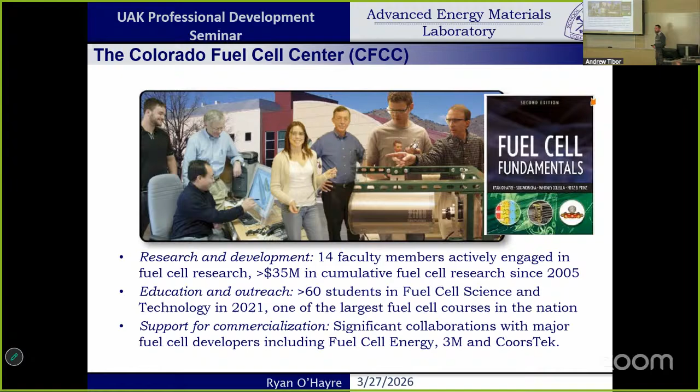So if you ever have a chance to come down to Colorado and you're in the Golden area, please come visit us. We do have skiing in mountains; this year, not so much. The snow hasn't been very good, but yeah, there's some good stuff to be had. That's Dead Dog Couloir, Torrey's Peak, less than a 40-minute drive from Golden. Matt and I did that. Actually, it was in March, I think, around spring break time. I don't know, 20-some years ago. And this is from that. I think that's also from Dead Dog. Some pictures from the Aspen tour. Yeah, good times. Fun stuff to be had down there.

All right, so let's talk about fuel cells. So what is a fuel cell? A fuel cell is a way of taking chemical energy, usually gases, and converting those directly into electricity through the magic of electrochemistry. So instead of burning the fuel like we would in a combustion engine and then eventually turning that into electricity, you can do it directly. And this schematic is kind of what the very first fuel cell developed by William Grove more than 150 years ago might have looked like when he was doing the experiments in his lab.

So imagine you have a glass beaker and it's just filled with sulfuric acid. And then you take two wires. They should be catalytically active. So if you've got the money, maybe you want to make them out of platinum. And you dip those two wires into the sulfuric acid. And then you take two little tubes and you bubble either air or pure oxygen across one of the wires. And then some type of fuel, hydrogen works best, but it's not the only fuel you can use, and you bubble that across the other wire.

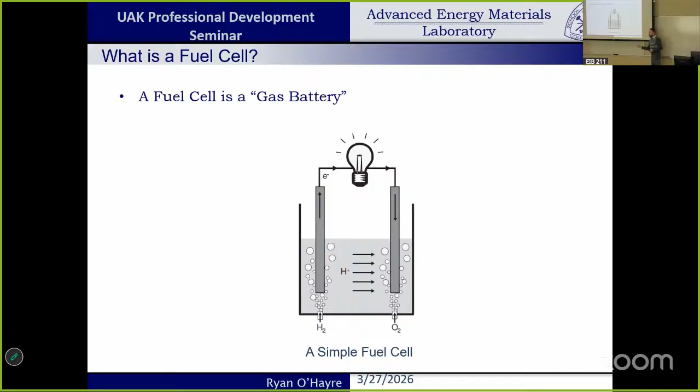Cross contamination, yes, absolutely, right? So you're going to get crosstalk. What if some of the oxygen sees the hydrogen and they both meet on one of the wires? That platinum catalyst is going to catalyze a combustion reaction and you just have yourself an explosion. So you want to bring those really close together, but you can't let the gases talk to each other. So we can think about maybe going from a liquid electrolyte to a solid electrolyte. Okay, so those are exactly the type of design principles that are used in modern fuel cells today.

So this is what a modern fuel cell looks like. Instead of those wire electrodes, we use big plate electrodes. And instead of aqueous sulfuric acid as our electrolyte, we use this thin polymer or ceramic membrane, which serves the same purpose. So it's electrically insulating, but it's ionically conductive. And because it's solid, that allows us to make it super thin and bring these two electrodes as close together as possible. But the gases still can't permeate through that solid membrane. So most of the problem's solved.

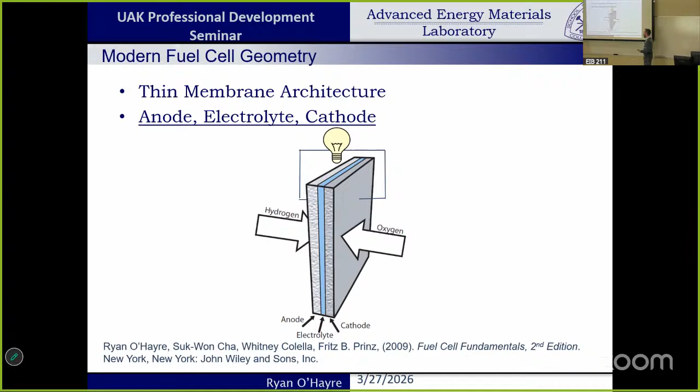All right. So why are we excited about fuel cells? They offer some interesting advantages. We don't go through combustion, so we don't go through the heat bottleneck, the Carnot cycle efficiency. That means we can be more efficient in producing electricity. We're not burning anything, so there's no particulates, there's no NOx or SOx or pollutants that are generated.

These devices are silent, so there's no moving parts. There may be some moving parts associated with the system, we'll talk about that later, but the fuel cell itself doesn't have any moving parts. So the military is interested in them because they're quiet power conversion devices.

The fuel cells are remarkably scalable. So we've made fuel cells that fit on an integrated circuit chip that you can use for remote sensing applications. And then there's also fuel cells that are big enough to make an entire power plant, the megawatt scale. You can't really scale combustion engines to fit on a microchip, right? So there's not many other power technologies that scale from the microwatt to the megawatt.

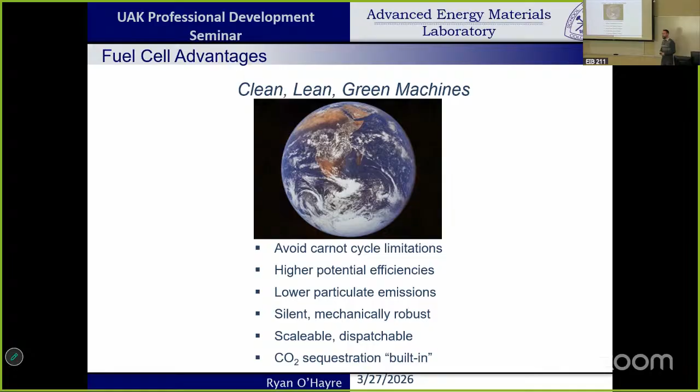Now there's also one interesting advantage, and I think it would be particularly interesting if Alaska wanted to pursue larger scale fuel cell applications. And that is essentially fuel cells give you CO2 sequestration for free. Okay. So I want to talk a little bit about this because this is hardly ever mentioned in the fuel cell field, but I think it's a really interesting advantage.

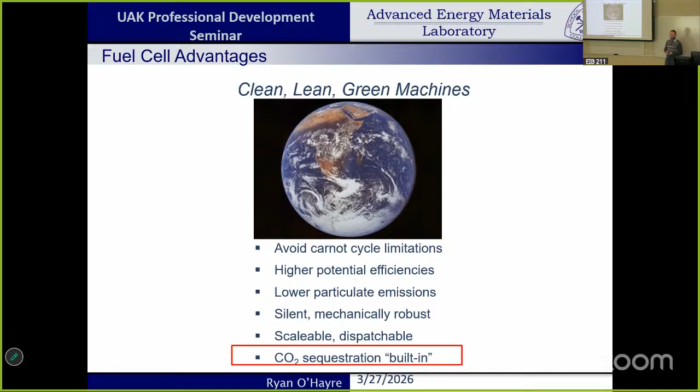So let's think about how we mostly make electric power today, which is in a conventional fossil fuel power plant. This could be coal, could be natural gas, but basically whatever you have, whether it's natural gas or coal, you feed it into some type of a combustion chamber, you mix it with the air, you do combustion, and as a result, you're going to have a single outlet and a single exhaust of your combustion products. And so that exhaust contains the CO2, which we might want to separate, and everything else.

And part of the problem with doing CO2 sequestration is how do you do that separation? And so if we wanted to sequester the CO2 from a conventional power plant, for every 2 conventional power plants that we want to sequester CO2 from, we'd have to build a third one just to provide enough energy to do that separations process. All right, so that kind of makes it non-economic.

Now let's think about how a fuel cell would do this. So same idea, we're going to use methane or coal, whatever we want to use as our fuel, just like a conventional power plant, and air. But now this is a membrane device, right? So you have the solid membrane separating two electrodes. And so you have two gas compartments. And those two gases never mix. They always stay on either side of the fuel cell. So the fuel always hangs out here, the oxygen always hangs out here, and you get two separate outlets.

The kind of reacted fuel, which is mostly just CO2 with some water, and then the cathode exhaust, which has everything else. The water is really easy to separate. All you do is cool the stream down, which you have to do anyway to recover heat. So you cool this down below 100 degrees, the water crashes out as a liquid, and you basically have pure CO2. You can sequester, you can use it for useful purposes, make a beer, whatever you want to do. So that's a huge advantage of fuel cells over conventional power plants.

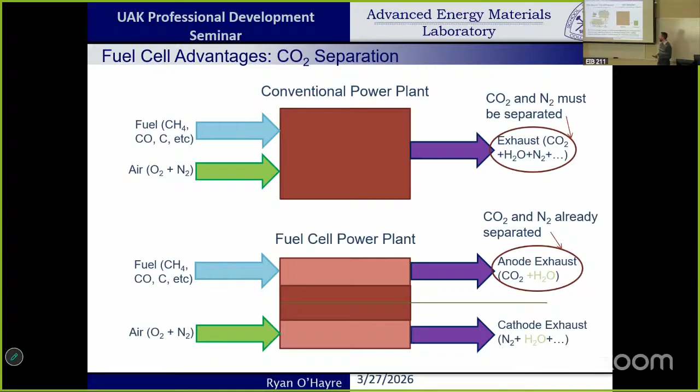Another interesting advantage of fuel cells that's just kind of in the last 5 years or so taken off is what's known as reversible fuel cells. So if you take a fuel cell, here's our fuel cell, we're supplying hydrogen to one side from a tank, air to the other side, we make water. All right, so that's a fuel cell, we're making electricity.

What if we have renewable power on the grid and it's a sunny summer in Alaska, we've got tons of renewable power that we don't know what to do with. All right, so once we've already powered all our homes and our buildings and everything else, we still have excess renewables. We can use that to reverse our fuel cells, the same exact device. Now we're just going to send electricity into it and run it backwards. When we run it backwards, we feed it water and it'll split the water. It's what's called electrolysis, and make hydrogen.

So we use that extra renewable energy in the summer that's basically free to make hydrogen, and then we can store it. Here, where you've pumped the oil and gas out of the ground, you've got a lot of caverns that are suitable for geologic storage. So you could pump all that hydrogen down underground for almost free. And then in the winter when it's cold and dark and you need that electricity, you simply run your device again in fuel cell mode and you pull that hydrogen that you've stored all summer out of the ground and you make electricity. And so you can do this back and forth, just like a battery.

But essentially this is a giant gas battery with a storage that's much, much larger and more extended than it would be for a battery system, right? Because we can take advantage of geologic storage to store all that hydrogen. In addition, if you look at the relative size of a fuel cell versus a battery, for the same amount of backup power, you can do it in a fuel cell that's much smaller than the equivalent battery. So space is also a constraint. Then again, fuel cells can win.

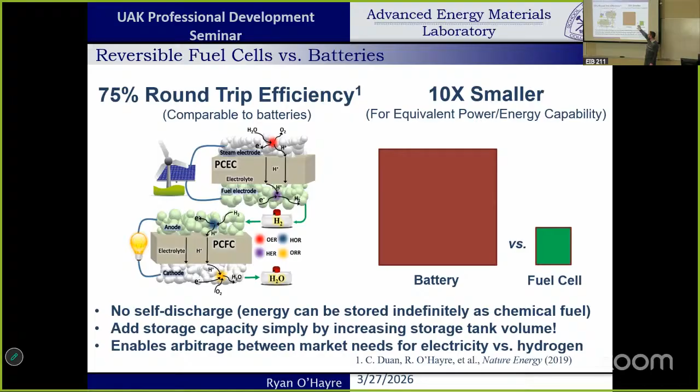So the polymer fuel cells work with that electrolyte. Remember we said it's important to make that electrolyte as thin as possible. We've got to make it out of a solid so the gases can't cross. So for the polymer electrolyte fuel cells, that electrolyte is a polymer. So if you ever have leftovers and you put saran wrap over the leftovers before you put them in the fridge, that polymer membrane that's inside of those fuel cells is basically like saran wrap. It's a super fancy saran wrap that conducts protons, but effectively, if I were to give you a piece of this, you wouldn't really be able to tell the difference between that and saran wrap. So that's kind of what it feels and looks like.

So those run at basically room temperature, or a little bit above room temperature. They're pretty high power density, so a small little fuel cell device can make a lot of power, but they're not super efficient. They're typically 40 to 60% efficient. That's better than an engine, but it's nothing to write home about.

The solid oxide fuel cells, these are the ones based on ceramic technology. So think toilet bowls, coffee cups, but these are super, super thin, again, plates of ceramic. And it's a special kind of ceramic that's an ion conductor. So to get the ceramic to conduct ions, you have to heat it up to kind of glowing red hot temperatures. And then it works. So it doesn't work at room temperature.

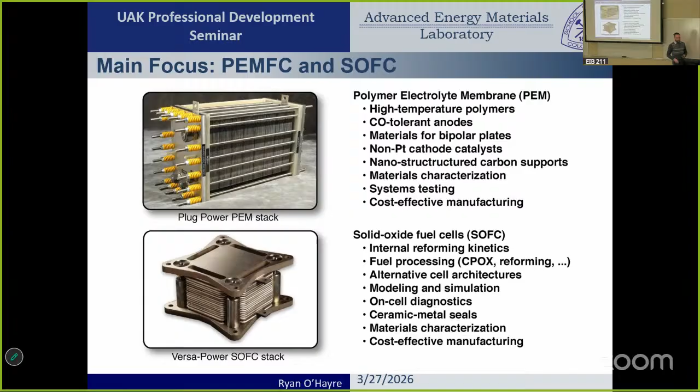And so hydrogen goes in on one side, oxygen goes in on the other side, water comes out. If there's any hydrogen that doesn't get reacted, it'll come out here. You can recycle it back in, so you never waste or lose any of the hydrogen. And the electrons, again, are collected. Usually these manifolds are electrically conductive. So not only do they provide the sealing and the distribution of gases, they also provide the electrical contact. And so just like the battery, you have your two little terminals that you hook up, right? These would be where you would attach your wires to collect the electricity that's generated.

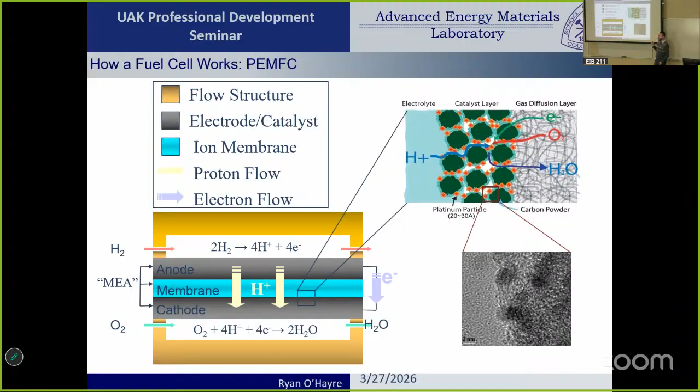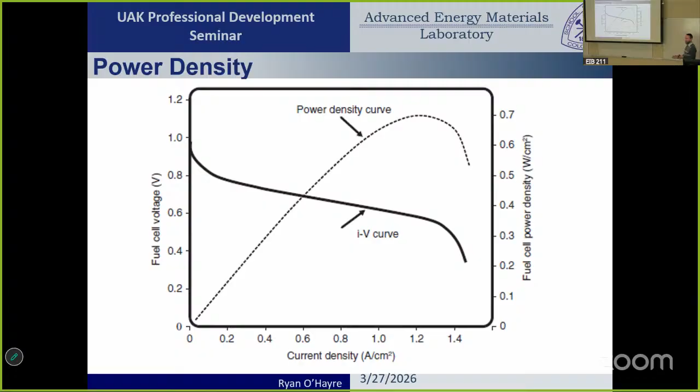Okay. So this power curve will tell you, per unit area of fuel cell, how much power you could produce. And you might want to operate here at the power density maximum if you care most about power. But if you care most about efficiency, you'll typically operate in this region, somewhere on the upward slope of the power density curve, but not all the way at the top. And that's because you'll operate more efficiently here. So there's always trade-offs. What do you care most about? Efficiency, power. So you can figure that out for your specific application, how you design your fuel cell.

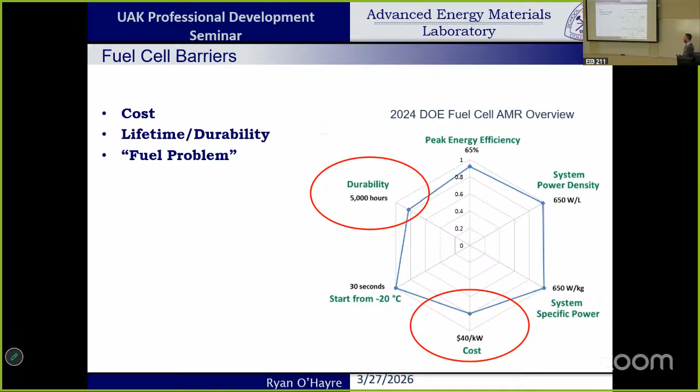So I circled the two that we're kind of the furthest away from: durability, how long they last, and cost. Right now they're really expensive and they don't last very long. So nobody's going to buy a technology that's expensive and then doesn't last as long as the incumbent technology that's already cheaper. So those are things we really still have to work with.

Okay, so that brings us to fuel cell technology. So first, how do you make these things? If you were to come down to Colorado and visit the fuel cell center, you can actually see how fuel cells are made in the lab. The process is very different for the polymer fuel cells, the low temperature fuel cells, versus the ceramic high temperature fuel cells. If you've ever made a t-shirt using a screen printing process, or if you've ever seen a roll-to-roll newspaper press, you basically use those same technologies to make a polymer fuel cell. It's like making newspaper or making t-shirts.

The only difference compared to a newspaper or a t-shirt is the ink. This will be the most expensive ink you've ever used. And that's because the ink has all this platinum in it, right? So you wouldn't use this ink on your t-shirt. All right, so PEM fuel cells, polymer fuel cells, the fabrication process, super cheap, super easy. The materials that go into it, like this ink and this polymer membrane, those are very, very expensive.

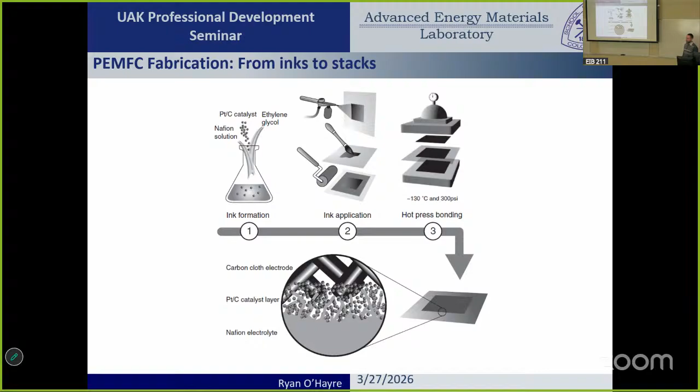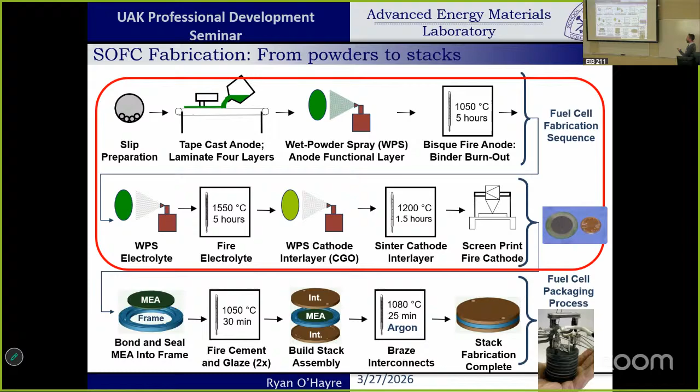Okay. Ceramic fuel cells are kind of the opposite. The materials, the raw powders that you use, are super cheap. They're basically like rocks. Ceramics tend to be pretty cheap. What's expensive is the fabrication process. It's tons and tons of steps. Many of these steps require super high temperatures, and that's expensive, like firing at 1550 degrees Celsius, that gets pricey. So it's the fabrication process that's the Achilles heel for the high temperature fuel cells.

So again, here's a few more examples of the polymer and solid oxide. The nice thing about the solid oxide fuel cells, right, we can form ceramics into pretty much any shape you want. You can make a coffee cup or a toilet bowl out of ceramic. And so, if you wanted to, I suppose you could make a toilet bowl shaped ceramic fuel cell. It probably wouldn't be very good, but you could do it.

So the two most common architectures for solid oxide fuel cells are these planar button cells or tubular cells. Tubular cells have some mechanical advantages. They tend to be stronger, everything else being equal, compared to a flat plate. Here you see these are all square, but for the ceramic ones, we tend to make them circular. Again, thinking about strength, does anyone have an idea why we might do circles instead of squares? So the corners don't break off. Bingo, right? Stress concentration factor. In a ceramic, the corners would be the failure points. So if you make it a circle, you don't have any corners, you minimize stress concentration.

And how do you hook terminals to them? Great, here we go. So just like with batteries, a single battery, like an alkaline AA or AAA battery, is about 1.5 volts. Your flashlight needs 9 volts or something, right? So what do you do? You take a bunch of batteries and you stack them back to back in your flashlight. Same idea with fuel cells. We usually don't just operate a single fuel cell, we operate a stack of fuel cells.

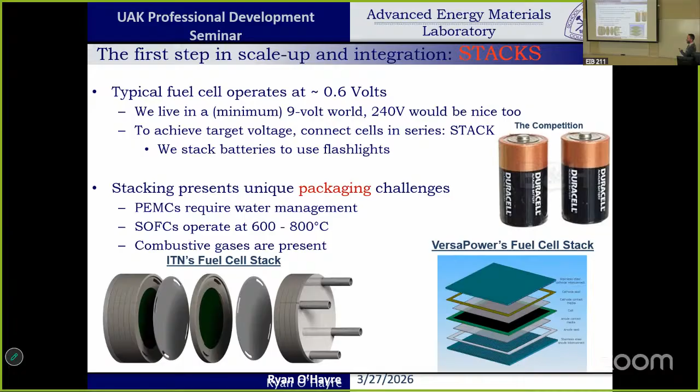So somehow we need to figure out how to package fuel cells so they're just as kind of dummy-proof, the Army says, as batteries. Once we can make fuel cells like this, then the Army can adopt them for soldiers. Okay. Now, the fuel cell itself: super elegant, no moving parts, silent, efficient. The bad news, well, I guess for you it's good news. It's primarily double E's and MECs.

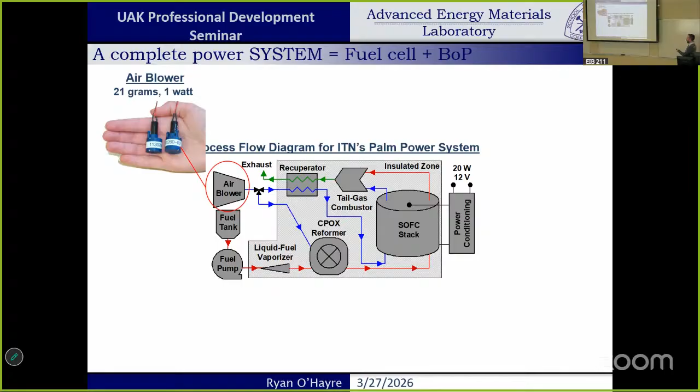A fuel cell by itself doesn't really do you much good. You need to have a fuel cell system to get useful long-term power. So what's a fuel cell system? Well, it combines the fuel cell itself with all the other things that you need to do to run it. Like you may need a blower to force the air into the fuel cell stack. You need a tank to store the fuel and then some kind of pump or another type of distributor, right?

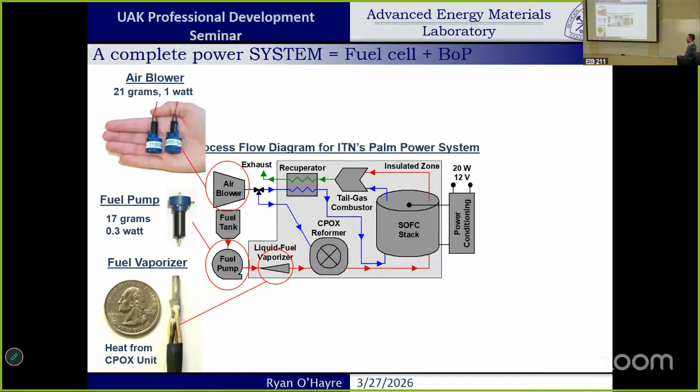If this is a liquid fuel or a gaseous fuel, again, you need some way of forcing that fuel and metering it into the stack. In this case, if we're starting with a liquid fuel and we need to turn it into a gas, you might need a vaporizer. You need a combustor here. If we're using hydrocarbon fuels, you need a recuperator to kind of capture the waste heat. You need a control system, which is not shown here, power conditioning, etc.

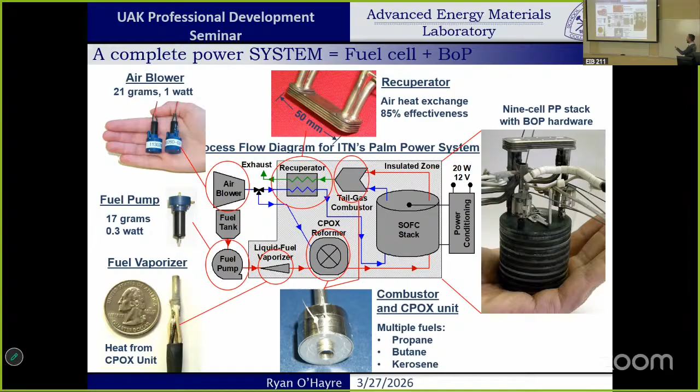Here's the actual stack again. So this is the stack part. When you add all those other pieces, including the tank for your fuel, the whole entire device is way bigger than just the fuel cell itself. And the total cost is way higher than just the cost of the fuel cell itself.

So the fuel cell part itself may only take up about 25% of the volume of the fuel cell system, and it may represent about 30% of the cost. So all these other components actually dominate the cost. And this is an opportunity for EEs and MECs, right, to think about how we do that kind of system design to bring down the cost and make these fuel cell systems simpler and more efficient.

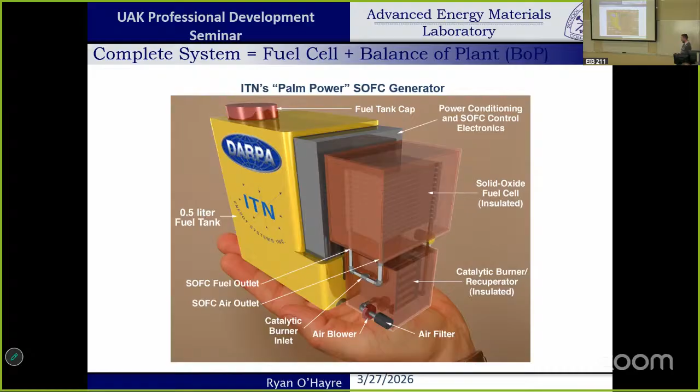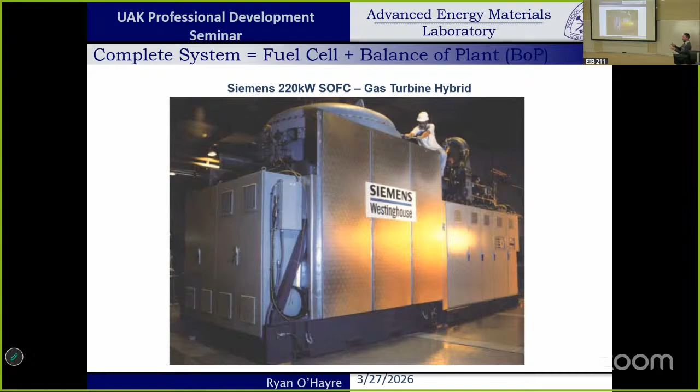So here, this is the fuel cell. It's in this pressure vessel. And then again, all this other crap is basically the system stuff, all the EE stuff. Right, so again, the whole system is much bigger and much more expensive than just the fuel cell part itself. Okay, applications. So I like to divide potential applications for fuel cells into 3 primary categories. So you have portable, like that soldier application we talked about, or maybe a fuel cell powered laptop.

You have stationary. So again, think microgrids, combined heat and power. You could even have your own fuel cell in the basement that would replace your water heater. You've got a water heater that runs on natural gas, replace it with a fuel cell. The fuel cell will take that same natural gas that your water heater used. It'll still heat the water for your house, and you'll get extra free electricity on top of that.

So if you're living in a place like Japan, where natural gas is super expensive, these fuel cell stationary units are actually taking off. They make financial sense already in Japan. So there's hundreds of thousands of these in residential households in Japan, especially northern Japan, Hokkaido.

Finally, vehicular. So George Bush, I don't know how many of you are old enough to remember one of his State of the Union speeches 20-some years ago, saying how we'd all be driving fuel cell cars. That hasn't happened. And that's because this is a really daunting problem. This is actually probably the last application space for fuel cells, and already batteries are much better for vehicles. So maybe for semi-trucks, long distance trucking, that's maybe where fuel cells are going to make sense.

But otherwise, I don't really see much potential for vehicular applications for fuel cells. I see the biggest potential here in the stationary application. And the biggest challenge is the fuel problem. If you're going to run in a stationary application to kind of be part of a microgrid, you're not going to run on hydrogen. Nobody has hydrogen in their microgrid, right? They probably have natural gas. And so making sure that our fuel cell can run on natural gas is critical.

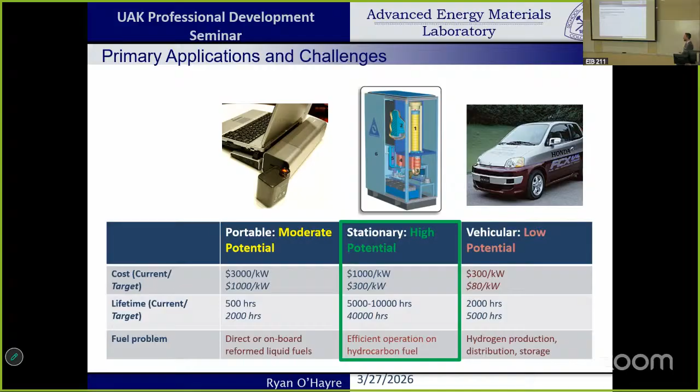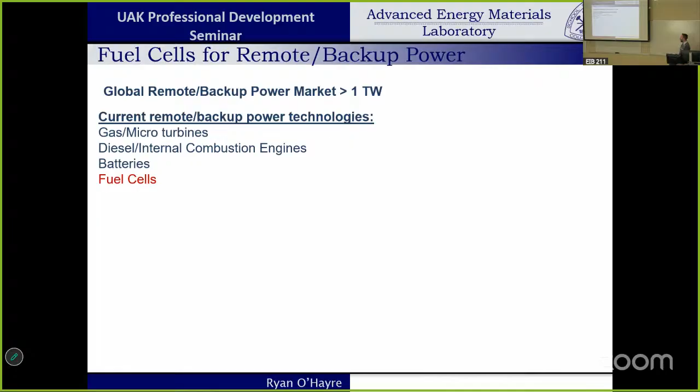Okay. So this brings us to Alaska and fuel cells for remote and backup power, which falls under that stationary application. So if we look at the competing technologies, batteries, diesel, microturbines, those are kind of what are used today in microgrids or in backup power applications. It's a huge market, over a terawatt of power per year. Here's how they do it in India, and I think maybe in some of the northern communities here. So these big old nasty, noisy diesel generators. Here is in Australia, where they use giant banks of lead acid batteries to power a village.

Now, would you like these as your remote power, or would you like one of these? This is a Bloom Box energy server. If you walked by one of these, you wouldn't even notice it. It would look just like any nondescript utility box that's outside of everybody's building or house, right? About the same size, relatively quiet. It might just emit a little bit of a hum. If you put your hand on it, it might be slightly warm, but otherwise you wouldn't even know that you're standing next to a massive power plant that's producing hundreds of kilowatts of power. So because these are so quiet, this solves the whole NIMBY problem, not in my backyard, right?

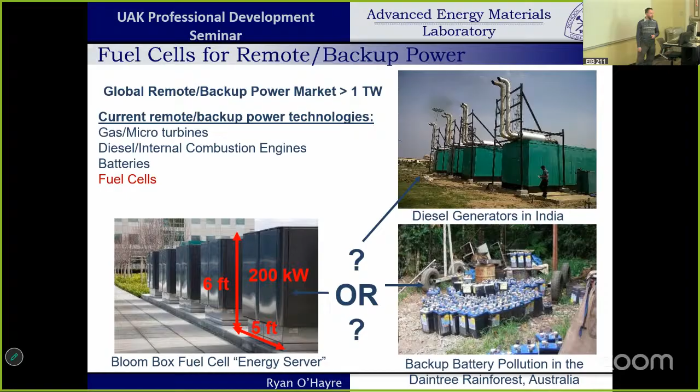So let's talk a little bit about batteries. So you probably heard of the Tesla Powerwall, right? So you can get one of these, put it in your garage. For scale here, I don't know, it's like maybe 2 feet by 4 feet or something like that, to give you an idea about the size of this whiteboard, and maybe 2.5 feet across, right? Something like that. Single one of those. You take 61 of those and you put them together, that would be the equivalent of one of those Bloom Boxes that I was talking about, right? So now you can see the power density advantage of fuel cells.

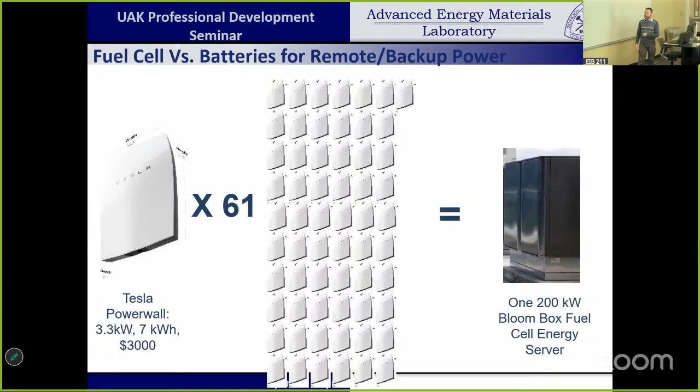Cell phone towers. This is actually where fuel cells are used today, including in Alaska. So you have these remote cell phone towers. They might be hooked up to the grid, but you still need to have a backup. If the grid goes down, we need communication even more in those type of emergency situations. So all cell phone tower installations are required to have a backup. And this is where fuel cells are often used. And so here's one of the companies that does fuel cells for cell phone backup power. So these are just all over the Pacific Northwest and in Alaska, mostly in the western side of the US.

So, are they used for backup because of the limited lifespan, like the 5,000 hours, you don't want to just burn through them? Yes, and they're also used for backup because they're seldom used, right? Like how often do you have, well, more and more nowadays in Colorado, we're getting a lot of outages. But how often do you have an outage? Well, if you had a battery, you would kind of say the next outage is going to be 4 months from now. So that battery is going to slowly discharge over time. You're going to have to recharge it so that it's always ready. So you're constantly topping off that battery, and that's bad for the battery.

And if it's just sitting there for 4 months and not getting fully discharged, that battery doesn't have a good life, and it won't be very effective, and it'll quickly fade in terms of its performance. Whereas a fuel cell doesn't care if it's off for 4 months, then you turn it on for backup power. But you have to have a source of fuel. Correct. So a lot of these have propane. So they just have propane, and that tank of propane will just sit there forever, right? It's not going to discharge the way a battery would self-discharge.

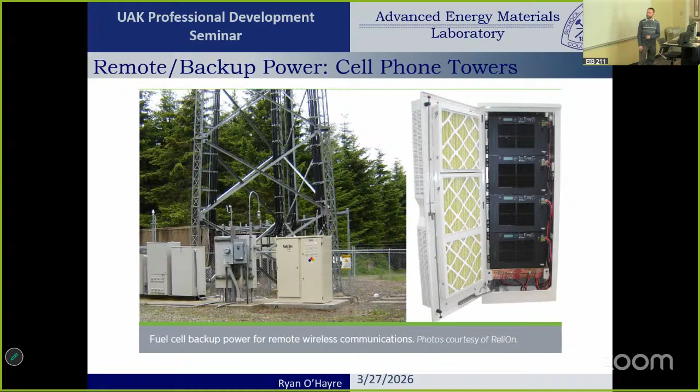Okay, so microgrids, and actually this is a paper that I found from Erin, when she was still at NREL, now called NLR, down in Colorado. So the scientist here, until very recently, was in charge of the U.S. Department of Energy Arctic Field Office up in Fairbanks. But I understand she's recently moved on. Before that, she was a scientist at NREL, the National Renewable Energy Laboratory, which is in the exact same town as my university, like 2 miles apart. So I have a lot of PhD students that actually go to the national lab for their research.

So this was a really fascinating article, a study of a microgrid using solar plus battery plus hydrogen fuel cell north of the Arctic Circle in this town. I'm not even going to try and pronounce it. What did you say the name of the town was? Kotzebue. Okay, Kotzebue, Alaska. Population? I don't know the exact population, but it's a hub. About 7,000. 7,000.

All right. So the idea here is, most of these remote communities run on diesel power. Diesel is already expensive, and when you have to transport it to crazy far places that are locked in by snow 7 months of the year, that adds even more to the cost, right? So if we can do something locally, even if it's expensive, it may make sense. So that's where these solar plus battery plus fuel cell type microgrids start to look attractive. And so they did a study looking at this for this particular community.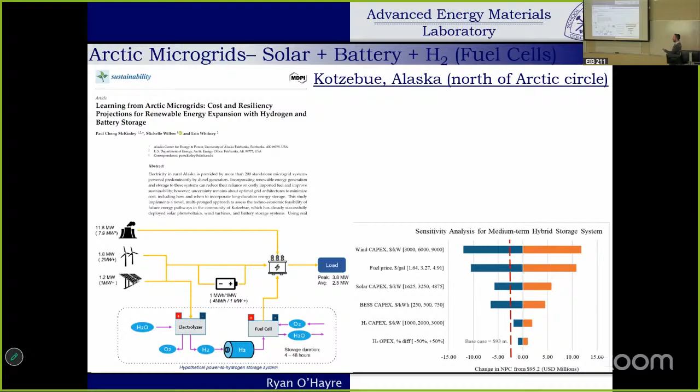So maybe we can hybridize these two types of storage, and that'll now give us a better coverage of the year. Okay, and so a couple of conclusions: in fact, going to a renewables-based microgrid actually lowers costs compared to diesel only. And the sweet spot is about 50 to 75% renewables. So you still then would use diesel to cover the gaps, the other 50% or 25%.

Now, if you want to get rid of diesel almost completely, you want to go above 75% renewables, then you definitely need to have the hydrogen and fuel cells. That's the most cost-effective solution. Just adding more batteries isn't going to get you there, or it's not going to get you there cheaply. So this is where hydrogen and fuel cells come in.

The other advantage is it can dramatically improve resilience. Fuel cells can act as a grid inertia provider better than batteries can. So sometimes these microgrids really struggle with inertia problems, where the fluctuating loads, either from demand or supply, are messing with you, and you need something to buffer that. Fuel cells are really good at that. And they also protect against diesel prices, right?

So this is a sensitivity analysis. This is super fascinating. These are what are called tornado charts. So they say, here's the current cost of this microgrid, and then let's vary one parameter and see the impact on the cost of the microgrid. So if we make one parameter better, cheaper, that's going to be the blue. How much of an impact is that going to have on reducing costs? And if we make it worse or more expensive, how much of an impact is that going to have on making the cost more expensive?

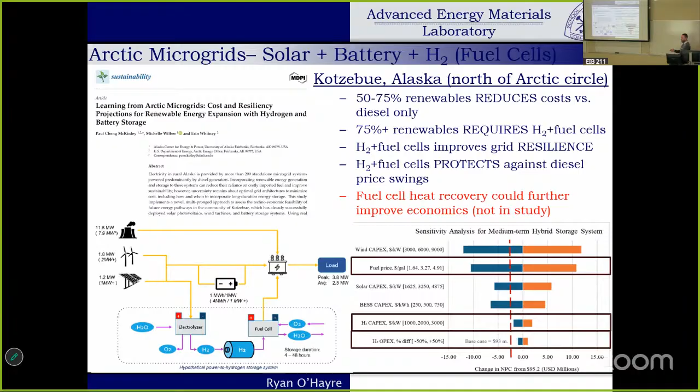Okay. Yeah, so this is the sensitivity. Diesel much more sensitive than the hydrogen system. And the other thing that was interesting is the authors noted that they didn't consider heat recovery. Remember we said that these fuel cells do generate heat. And if you capture that heat, that can be an added value. And again, for these kind of communities up in the north, that heat is valuable. So that could further improve the economics. You're going to get the heat in the fuel cell. You won't really get that with the battery system.

Okay. So other Alaska communities are now exploring these kind of systems based on this. And specifically, I was able to find preliminary studies going on in these places. And I did Google Maps. I know I've been here down in the south, but I had no idea where these three places were, but now I do. Kind of interesting.

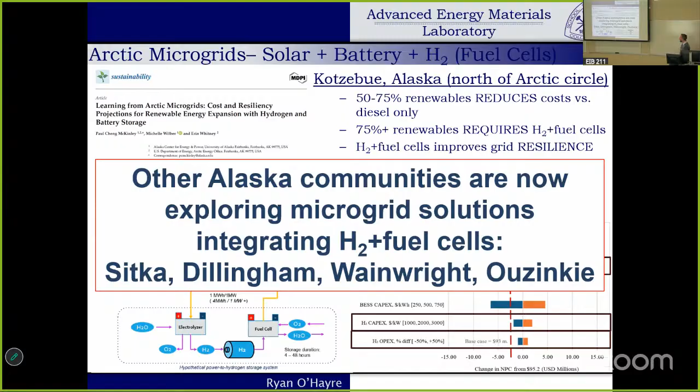This one's way up in the North Slope, and these are kind of on remote edges of the coast or islands. Are you familiar with all these places? This one is Kodiak. Okay, Kodiak. Dillingham, southwest. Wainwright's northwest. Right. Cool. So I got my Alaska geography lesson. Kind of fun.

Okay. So for the solid oxide fuel cells, this is kind of my main focus. Again, stationary and backup power applications. We look at California, which has had some of the most supportive tax incentives for fuel cells. They're all over. Wastewater plants, you actually get methane from the wastewater plant, right? Anytime you drive by a wastewater plant, you smell it. So you can use that. It's free fuel. Hotels, food processing, breweries, universities, hospitals, some grocery stores, and then the big one.

The big one now is data centers. And data centers are starting to adopt these fuel cell power servers from Bloom like hotcakes. So Bloom has already sold out through 2030. They have backlog on these things, and it's all driven by data center demand. So here's some examples. This is an installation at eBay. If the eBay system goes down for a minute, they're losing millions of dollars. So they have these Bloom servers, which have basically 100% reliability.

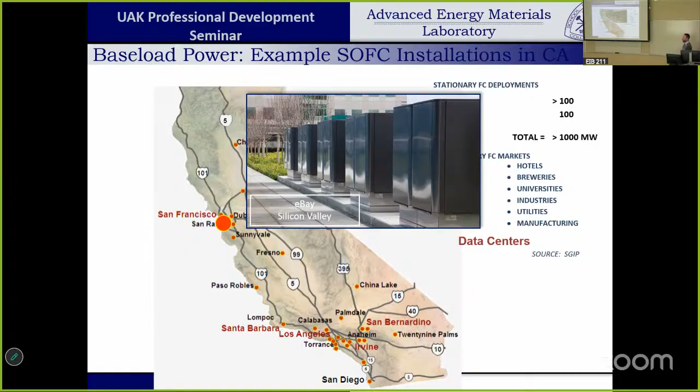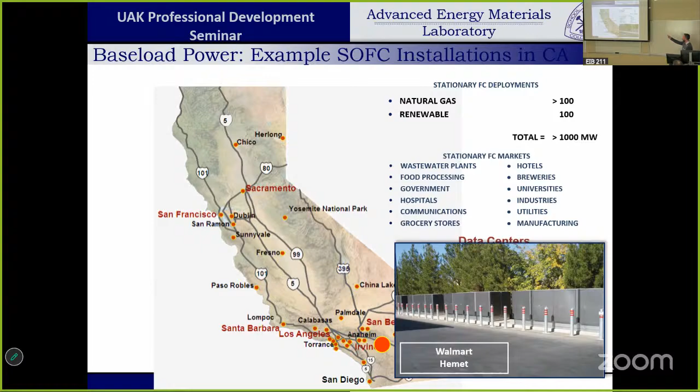Google has these for backup. Caltech, university down in Pasadena. Walmart's, so you would never know. You go park at this Walmart, you have no idea what those are. So stationary applications, this is the big one for fuel cells, in my opinion. And again, the biggest problem here is in the last red part here, efficient use on hydrocarbons. So that's where my research comes in.

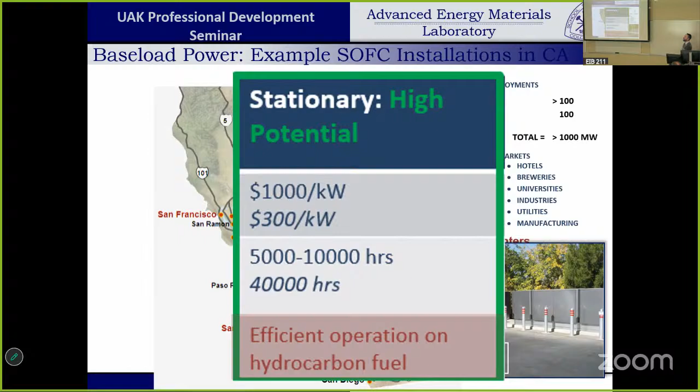We still have just a couple minutes left. All right. Yes? Sorry, quick question before you go on. So an application like eBay, their fuel is ostensibly just natural gas from the local distribution? Yep, exactly.

Okay, so the type of fuel cell I work on is a ceramic fuel cell, but it's a very special kind of ceramic fuel cell. It's only been developed in the last 15 years. They're called protonic ceramic fuel cells. So the basic idea of these is they're great for reversible operation. So you can use them to make power, but you can also run them backwards. You can make hydrogen, but you can actually make more complicated things with them. We're going to talk about that for a minute.

So with protonic ceramics, we can actually move reversibly back and forth between the world of electrons and electricity and the world of chemistry and chemicals. And I'm going to share with you just a couple of vignettes. So if you were to peer inside one of these protonic ceramic fuel cells, this is what they look like in a 3D drawing.

Here's our fuel, so hydrogen or natural gas coming in, and the air coming in on the other side, protons going across. And these are really good not just for hydrogen, but for more complicated fuels like methane or natural gas. And that's because on the anode side, the fuel side, you have these tiny little nickel particles on this special kind of ceramic, which has unique surface chemistry with these surface hydrogen and hydroxide type species that help basically reform that fuel and keep it from coking.

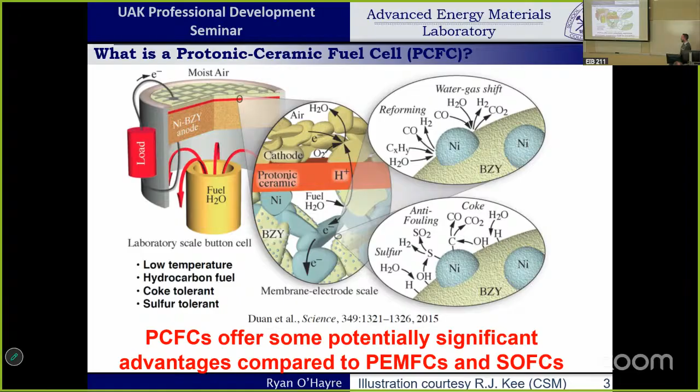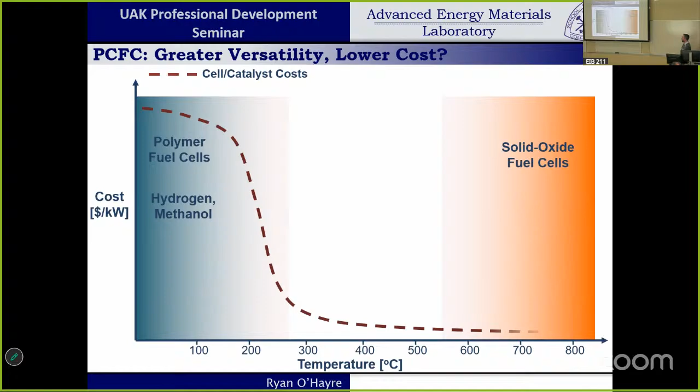So if we think about the two main types of fuel cells I told you about, right? Polymers, low temperature; solid oxide, glowing red hot temperature, right? So for the polymer fuel cells, the ingredients, that ink, really expensive. For the solid oxide fuel cells, it's the stack system, all the packaging components. They have to withstand those really high temperatures. So that's expensive. So either way, you kind of get screwed. One thing or another is expensive. These protonic ceramic fuel cells are in the middle region where we like to say everybody's happy.

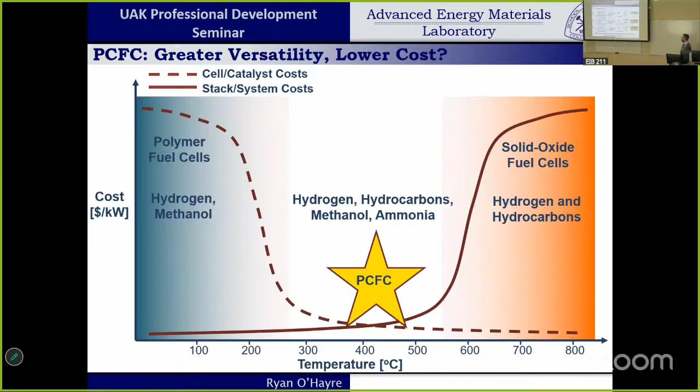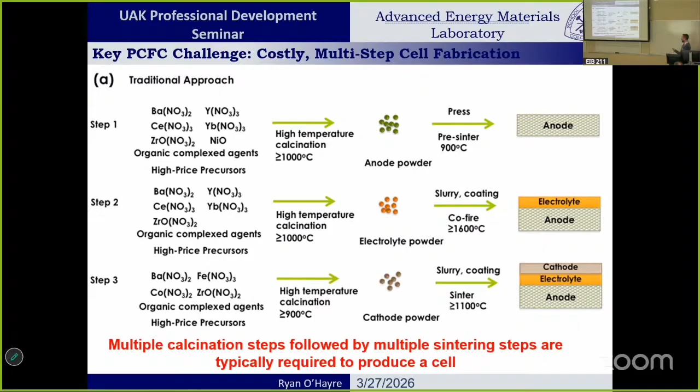Okay. So we also talked about the other problem with the ceramic fuel cells, the processing, right? Super complicated, takes a lot of time. That makes them more expensive. So we've been working on this problem. We figured out a way to basically take all these complicated steps and convert it into a single step process, just like you would bake a cake or a cookie at home. So if you can make fuel cells like you make cookies, they'll be way cheaper. That's our grand vision.

So with isooctane, gasoline, being lowest, you would expect diesel or other heavy fuels would probably be similar. Even lower, yeah. And with those, you might want to do a pre-processing, reform them before, and then send the simpler reformed fuel species into the fuel cell. Don't let it see the diesel directly or it'll die.

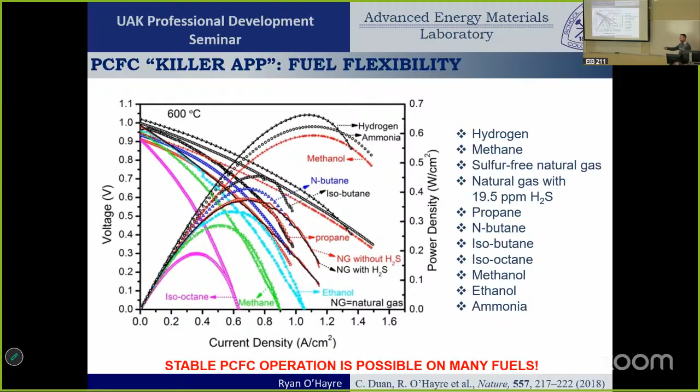You guys were able to just sequentially... Yeah. You would just switch it first, like with anything, or... Yeah, I don't remember the exact sequence. But you didn't change anything, you just pumped the fuel in there, then the next fuel, the next one? Yep. And furthermore, this is easy, right? You can just test it on a fuel for an hour or something and then switch to the next fuel. But if you tried to run it for days, is it still going to work? We talked about how the performance dies over time. This is a fun video.

So we take high school students into the lab to do these kind of outreach tours. I designed what I call an air breathing fuel cell. So this is one of my protonic ceramic fuel cells. It's the size of a US dime, to give you perspective. And what we've done is we've just taken a dab of silver paste and used that to attach these lead wires to the two terminals, the plus and minus sides of our dime-sized fuel cell.

And we've connected that to a little DC motor that's going to power this fan. So you're going to be able to visually see the electricity production. This is what we call an open air fuel cell. So it's the simplest possible fuel cell design. So the top is going to be breathing in oxygen from the air. That's the cathode. And on the bottom, we're supplying hydrocarbon fuel species and heat from a little butane lighter. This is the exact same type of lighter you use for your 4th of July barbecue.

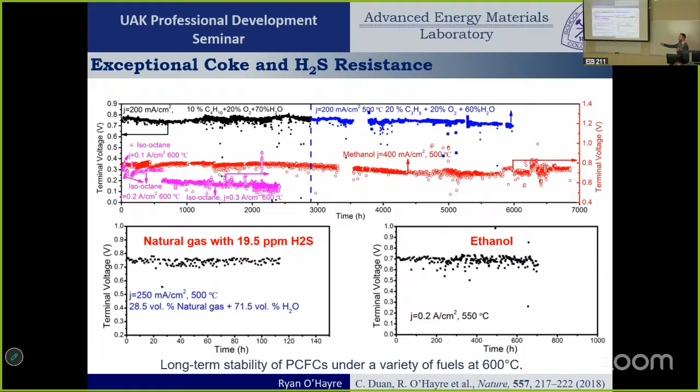So why does this work? Well, this is something we're still exploring. It's all this chemistry stuff, so I'm not going to bore you with the details, but basically there's interesting surface chemistry associated with these ceramics. And you get these hydroxide type species that will eat the carbon, the soot that tries to deposit, and the sulfur, and oxidize it to SO2 or CO or CO2, which will leave. Right, so you basically can clean any solid deposits that start to build up.

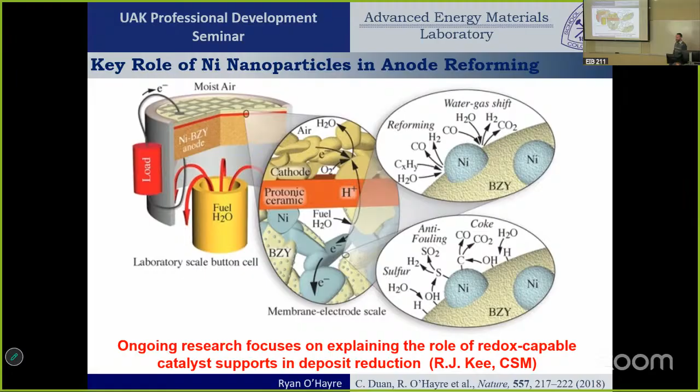So batteries actually aren't that much more efficient. You don't really notice this, but when you charge a battery, you waste some of the electricity that you're using to charge the battery. It's not 100% efficient charging it. So you may waste 10% of your electricity as you're charging it. And then when you turn around and discharge your battery, again, it's not 100% efficient. So you may waste 5–10%. So when you do the same kind of calculation for a battery, you're going to be on the order of 80%. So this round trip fuel cell, not much worse than a battery.

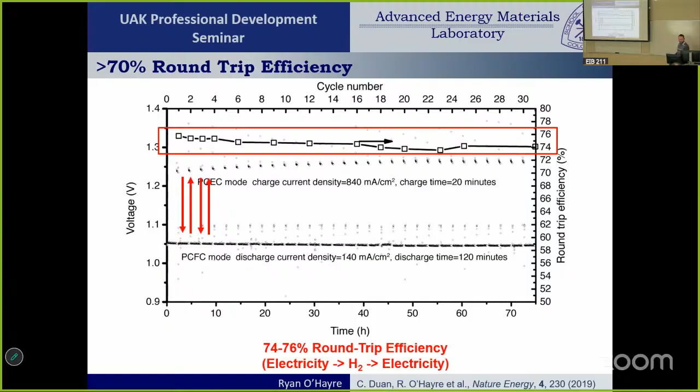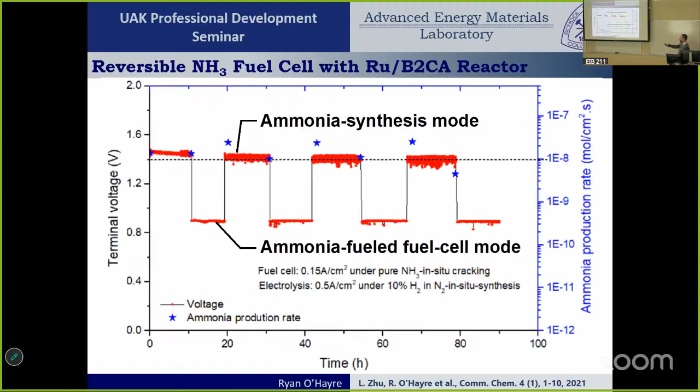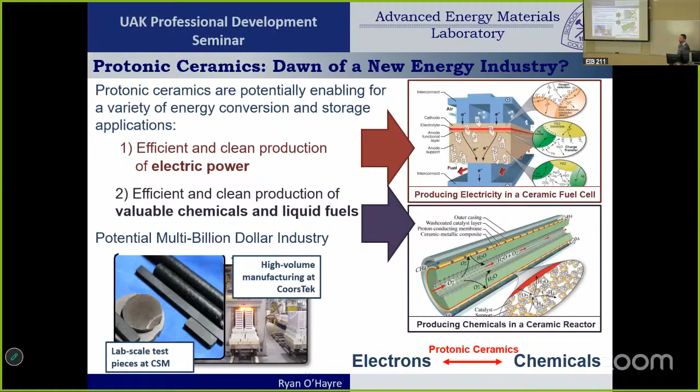All right, so that's basically how these protonic ceramics can transform reversibly between the world of electricity and the world of chemistry. That does it.